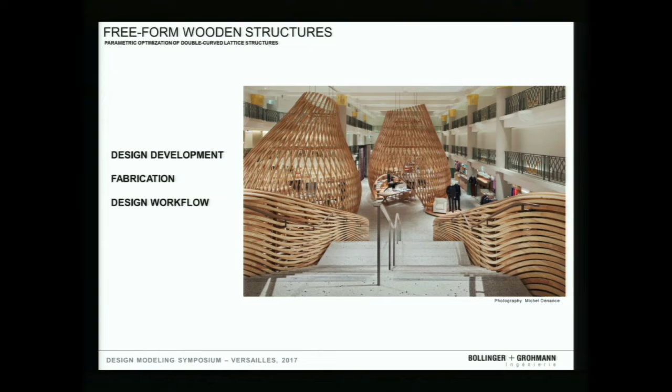I will present you a few projects which have been made on lattice structures, 3 projects which have been made in collaboration between RDAI and Bollinger Grohmann over the past 10 years. So here you've got an image of this kind of structure. It was made in Paris in 2009 for the Hermès flagship store, Rue de Sèvres.

And as you can see, it's composed of wooden bubbles, composed of double curved wooden lath. And they are freestanding elements. I mean, the cables you can see on the top are just a suspension of the lighting. They are not connected to the structure.

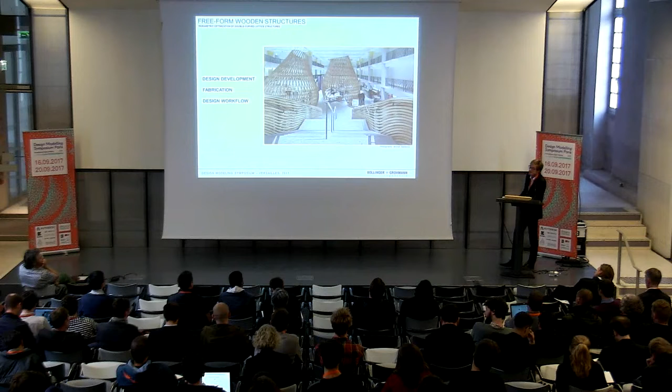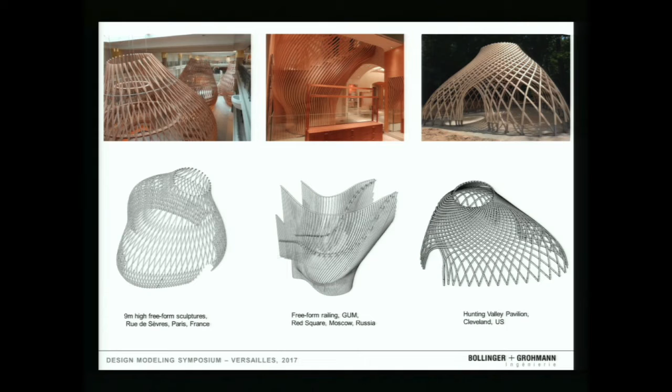So I will present through those different projects 3 main aspects: the design development stakes, the fabrication issues, and the design workflow ones. So just a short introduction about those 3 projects. The first one is Hermès Rive Gauche, that you can see on the left. The second one is Hermès Moscow on the GUM. It's composed of a railing made of double curved unique pieces. And the last one is a private pavilion in Cleveland used as a piece of art for a private client.

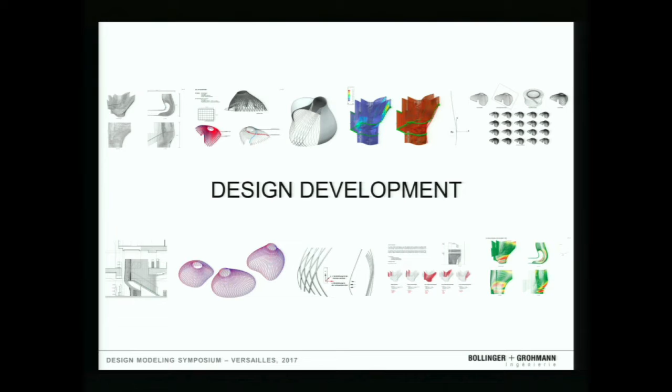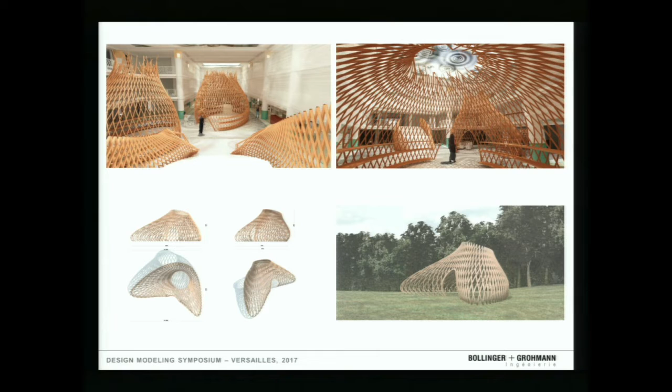So first I will present the different aspects which have been worked on from the beginning in collaboration with the architect. What we basically got from the architect are those intentions, which have to be improved and implemented with different types of constraints. And one of the main ones is the generation of the surface and the tessellation. So a great job has been made from the beginning to regenerate those master surfaces as a function of different parameters, aesthetical ones, of course, but structural ones, and others connected to fabrication.

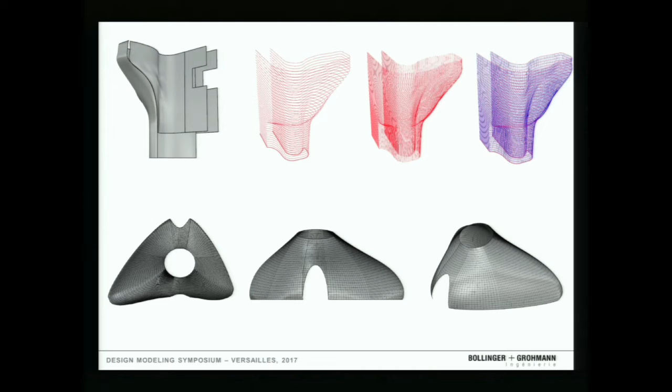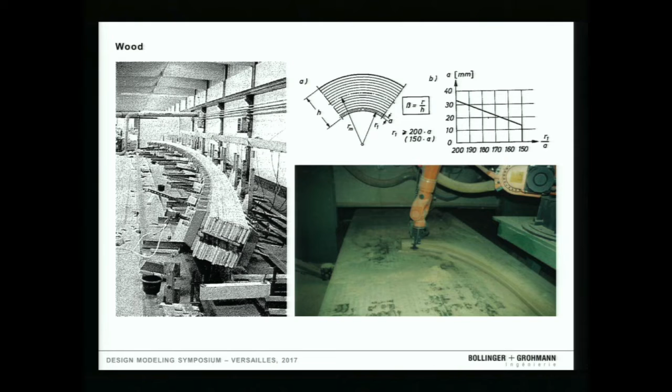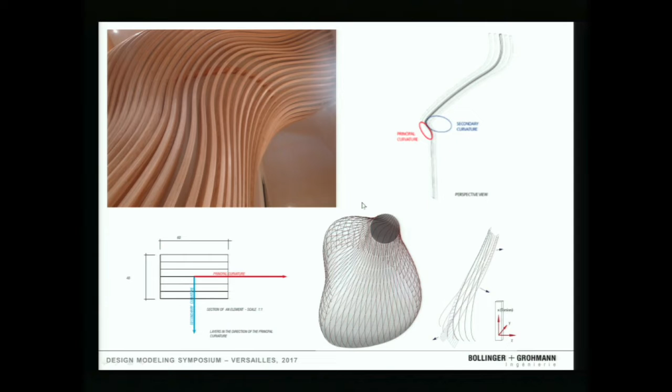One of the main issues was the curvature. As explained previously, the thinner the wooden plate, the smaller the radius of curvature, which on those pavilions was an important stake. For those laths here, for example, you can see laths from the railing in Moscow. They are 6 meter long laths with radii of curvature less than 80 centimeters. So for those elements, we distinguished the different curvatures and the torsion, which were implemented from the beginning into the model. Those are studies on these curvatures, made from the beginning till the end through a unique global model.

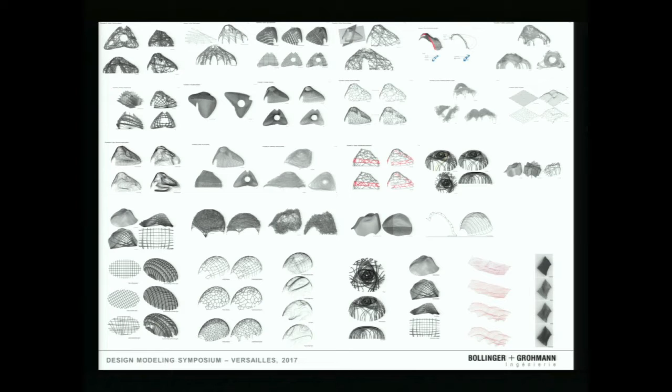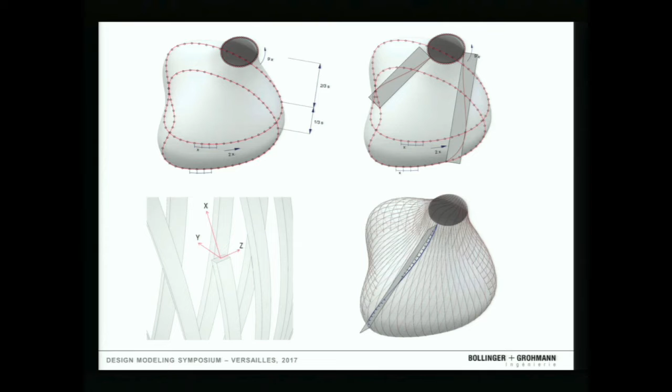So when taking into account those different constraints, we were also designing different possibilities for the pavilion, different types of tessellations. Basically, one of the main tessellations used in Hermès Rive Gauche as in Cleveland was just a splitting of the surface with 2 generator curves divided into points and then connected through curves. And then those points are shifted along the curve, as you might generate a hyperboloid from a cylinder. And then a tessellation has been applied on it.

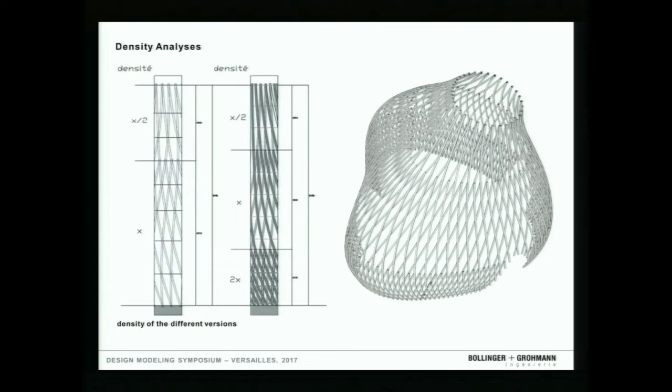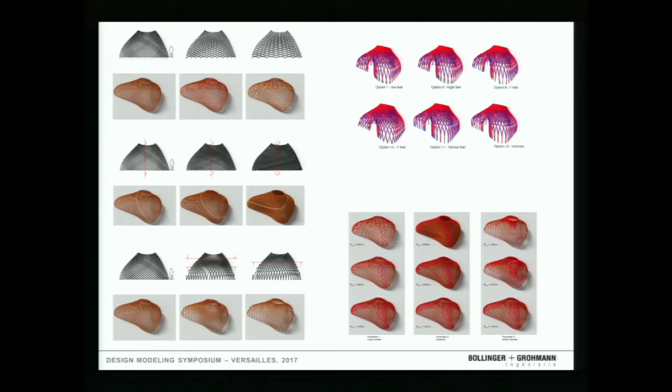So as I said, the curvature issue, but also an aesthetical one with the density, which has been improved and evolved in the model through parametric software. Here you can see on the left pictures the work on the density with the number of rods, the rotation around the central space, and also the spread of the density, as the architect wanted a pavilion which was lifted up with a very vertical feet and a high density on the top level. All of this work has been made taking into consideration the other parameters.

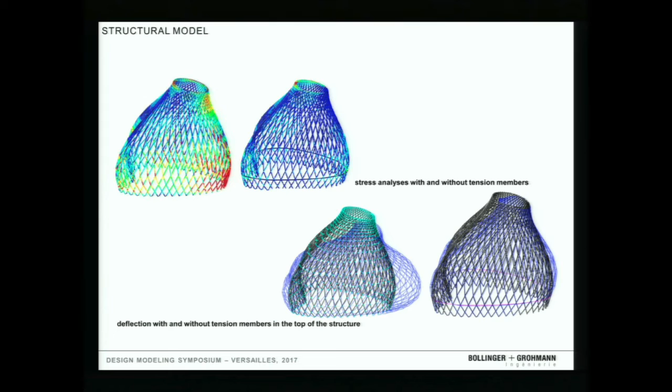One of the main other parameters was the structural one. As you might know, this kind of structure might need wind bracing, which here in Sèvres was placed on the top, but other options have been developed for the other pavilions. If we take into consideration just the connection details, it was made with 3 rods. The central one is just here to handle the shear force between 2 laths, but the 2 extreme ones are here just to block the rotation between the laths themselves.

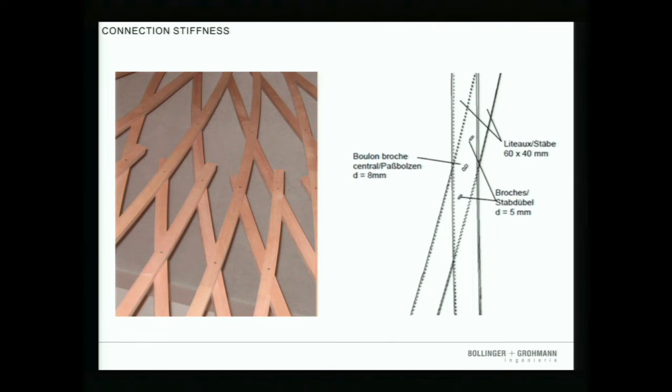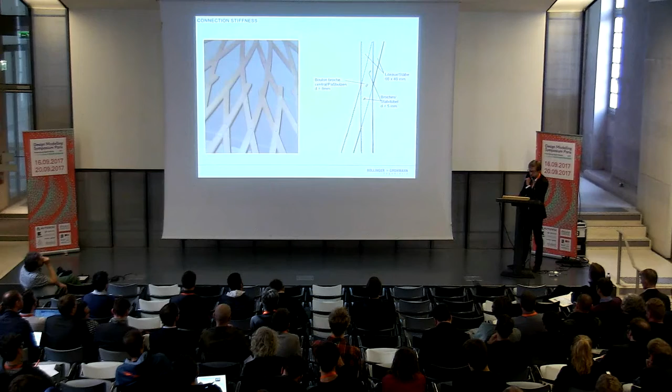But the bigger the angle between the laths, the smaller the distance between these 2 rods, and then the lower the connection stiffness for blocking the rotation. That's the reason why in the pavilion of Cleveland, this angle has been taken into account in order to implement the connection stiffness all around the different types of connection. So even though the stiffness is quite low, we are speaking about a distance between 2 bolts of a few centimeters, with the large number of them, more than 1,000 connections, it can handle the different loads.

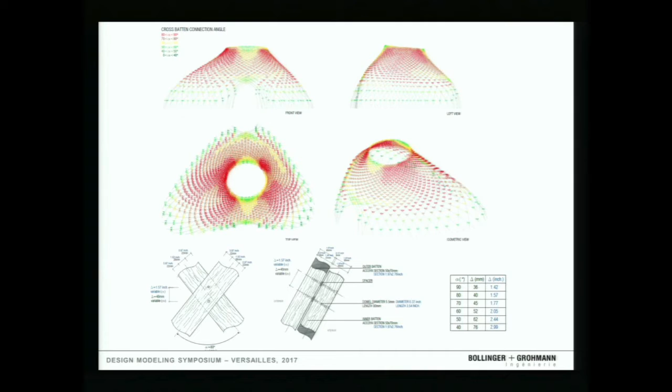So for the pavilion of Cleveland, which was placed outside, so submitted to variations of temperature and humidity, a finer approach on those loads has been made, with an approach on the ice and snow accretion placed on top of the pavilion. As you can see, it's still standing.

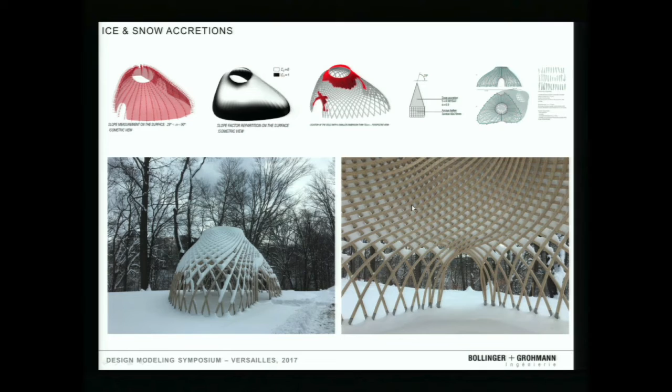Another main issue was the fabrication one, which has been tested on different pavilions. So just a first element about the type of wood: here we were using ash tree and oak tree for the project of Hermès Rive Gauche in Paris.

But as the pavilion of Cleveland was placed outside, for questions of durability, a special type of wood has been used, which is Accoya. It's a specific treatment on the timber in order to preserve it. And it was the first time this type of wood has been used with this type of bending process. That's the reason why different tests have been made on it.

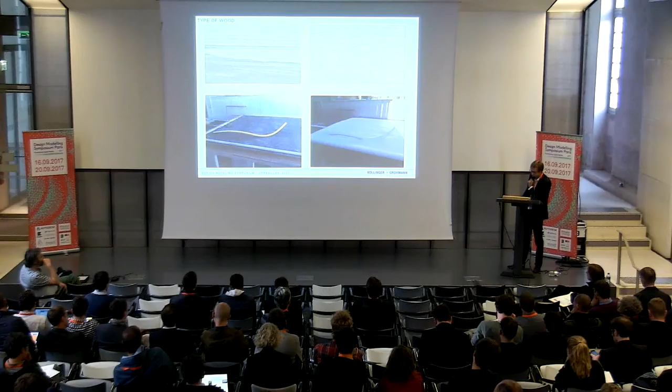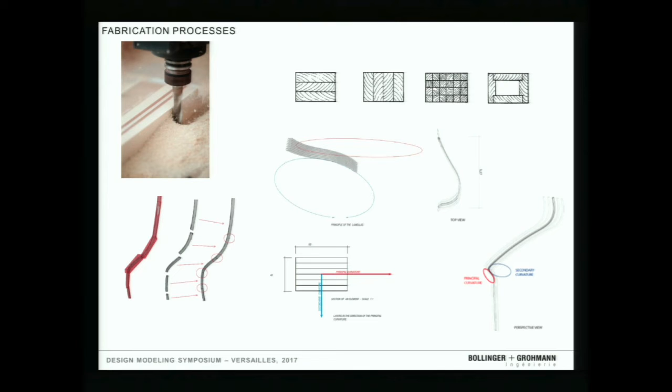So about the processes of fabrication, one could say, okay, let's mill all those pieces and then stick them together, as you can see on the left. But then you will face different troubles, structural issues, but also aesthetical ones, of the discontinuity of the fiber. So that's the reason why other processes have been used.

So the first process which has been used in Hermès Rive Gauche was the use of 3 layers of lath, which were milled from wooden plate in order to obtain the first curvature. Then those layers were glued while bent in order to obtain the second radius. So here you can see an example of the prototype from this pavilion.

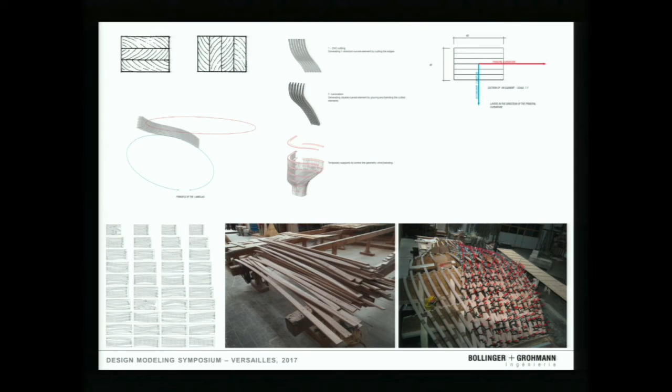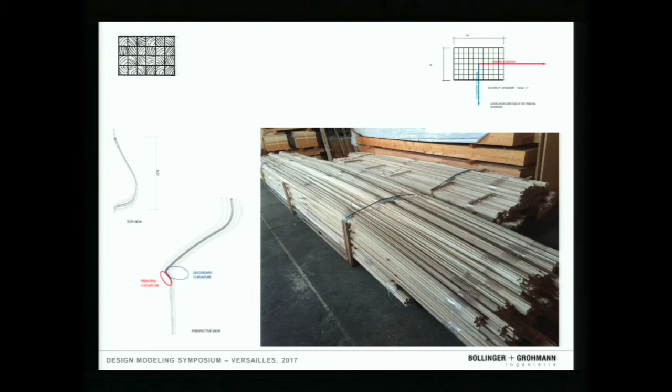Another technique which has been used, as you can see here, was the use of small square sections, allowing small radius of curvature in both directions without troubles due to a variation of fiber orientation. And here you can see some pictures of the fabrication.

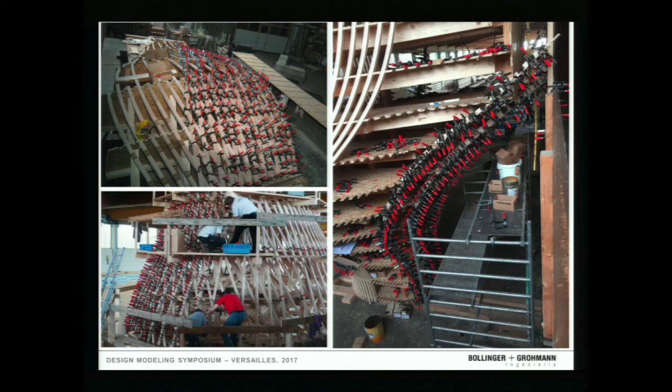So the laths are glued and placed on the scaffolding. For each lath, approximately 6 people were needed at the same time, so quite long. And here you can see the clamps on the lath. They are placed every 10 centimeters during the fabrication.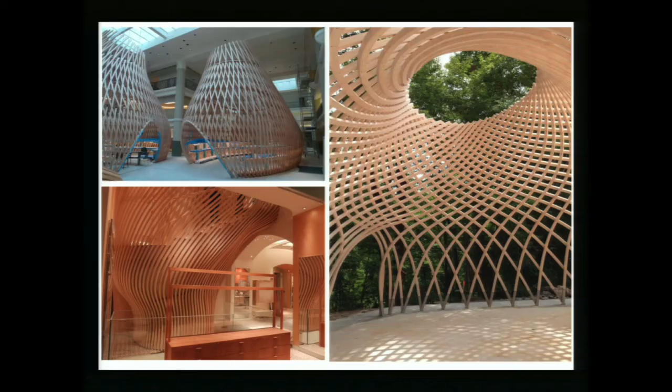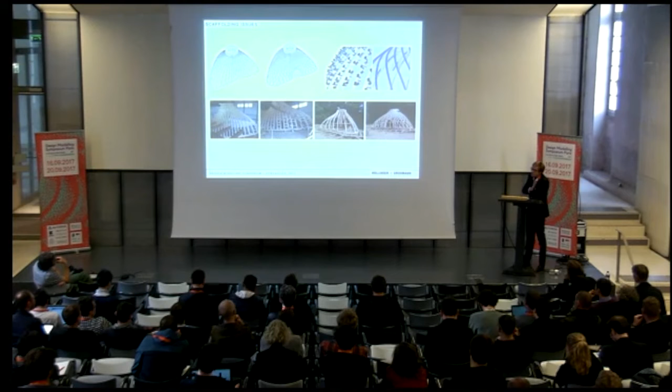One aspect from this was the scaffolding issues, which have been improved for the Cleveland pavilion, where the scaffolding, which is carrying the whole intelligence of the shape, because it's the support of the slab while bending, here was only made with straight pieces with rods placed on it in order to have a proper control of the geometry.

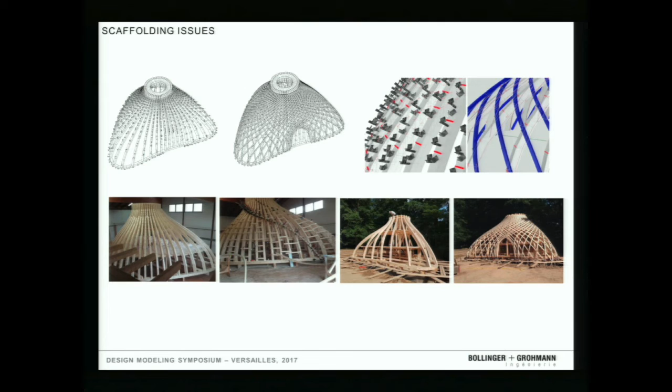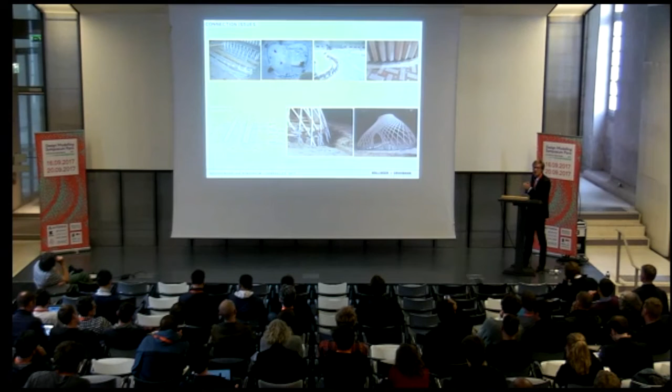One other issue was also about the connection, how to produce kind of unique or semi-standardized elements. So for Hermès Rive Gauche, for example, the feet were steel plates, welded with 3 different angles and incorporated in the slab, which has been changed in terms of process for the one of Cleveland, with tubes in the continuity of the lath.

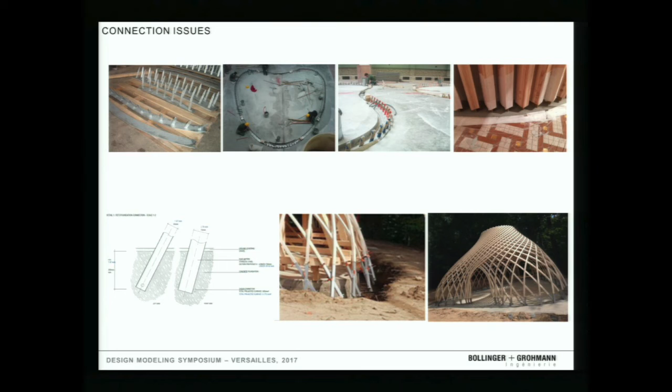Then just a few words about the design workflow. Yeah, I would like to thank all our collaborators, who have made a really great job in this pavilion.

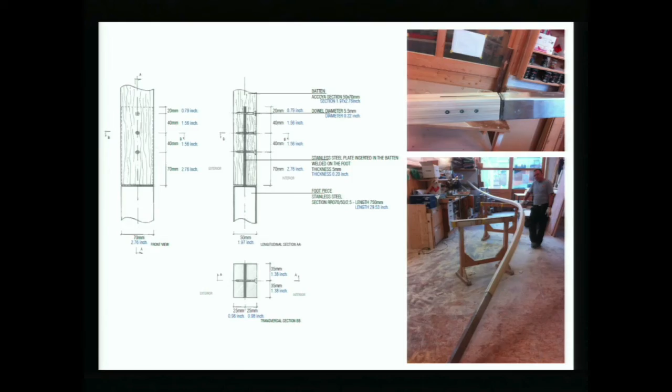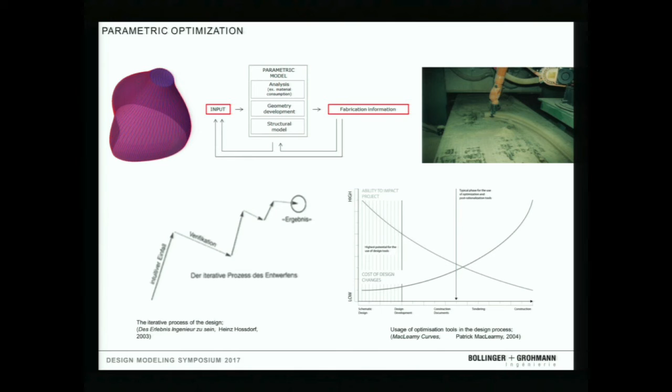But I want to focus on one specific point, which is the use of a global model generated from the master surface given by the architect, through the tessellation, the analysis of the different elements, the curvature, the structural model, the setup of all the different details, till the fabrication of the pavilion and of the scaffolding. And this took place from the very beginning of this project.

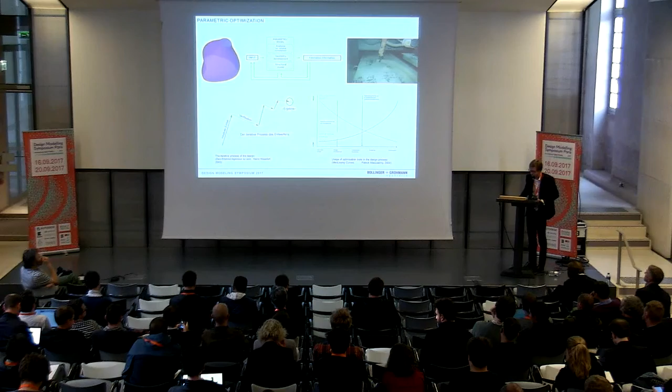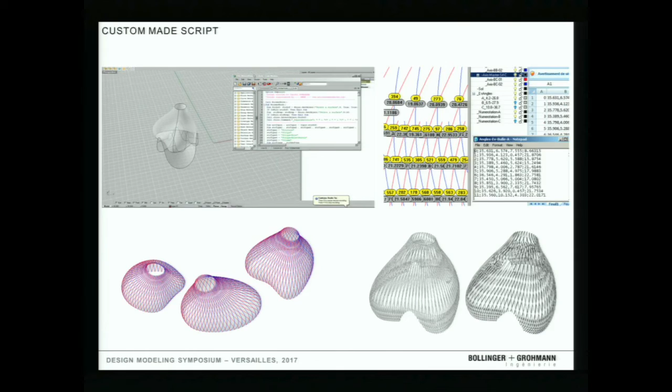For Hermès Rive Gauche, in 2009, a Rhino script was used, specifically made for this project, connecting through Excel sheets the 3D model to the structural ones and generating the double curved lath. So yes, it was this idea of having one unique model generating all the elements: the details, the possibility of shipping, the structural elements, the interaction between the environment and the production.

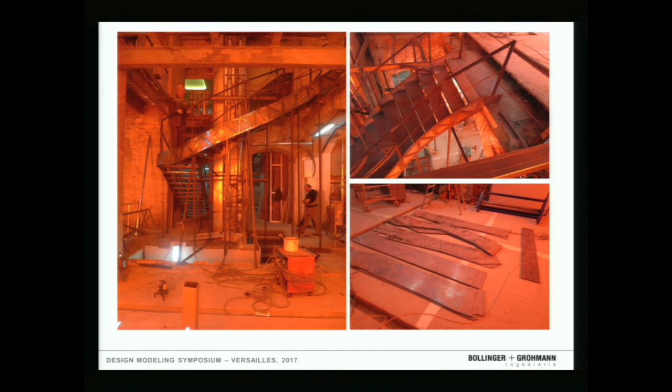And it has been illustrated in the project of Moscow, where this cladding is enveloping a central stairway. But this stairway has been made quite early and has been changed several times. Steps have been cut out and replaced and then extended several times. That's the reason why this model, which took into consideration the very input from the architect and gave the last result, was a very useful tool for the conception of this railing.

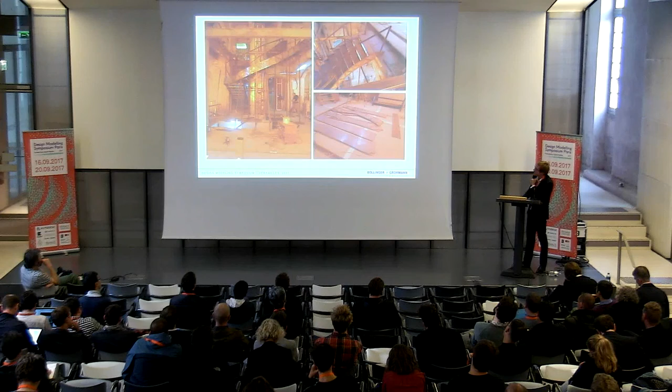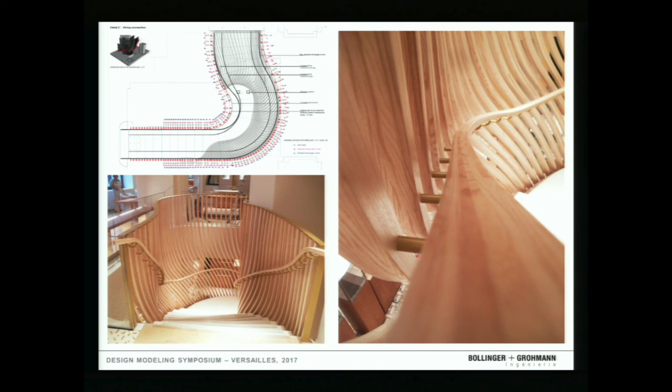So here is a support of those double curves, which have evolved. And as you can see here, it's a detail of the railing where specific diagrams were directly extracted from the Rhino model, in order to define the geometry of the railing. This railing has been ruled by different laws: the distance to the railing, the distance to the step, the height of it. So that's the reason why, with a very narrow and constrained site, this model has been a very useful tool.